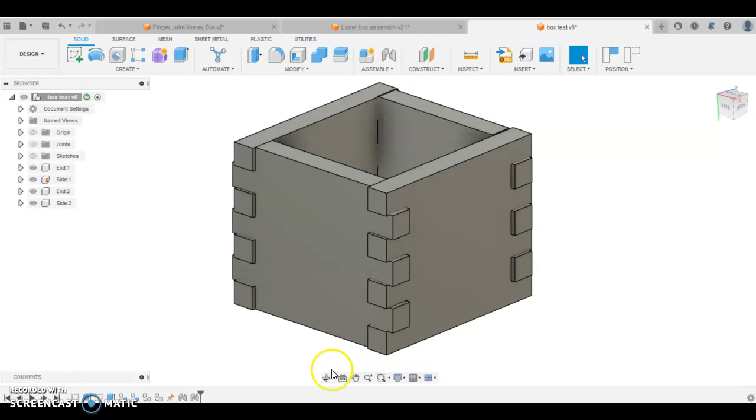I'm going to talk you through how to make a finger jointed box. We're going to use Fusion 360 for this, which is the very manual way. There are other ways—if you look online, there's one called MakerCase.

If we go into MakerCase, we can set all the parameters to create a finger jointed box, and export those plans. That would work really well if we were going straight to the laser cutter, but if you want to edit that further, there's a bit of a process of putting it into Fusion.

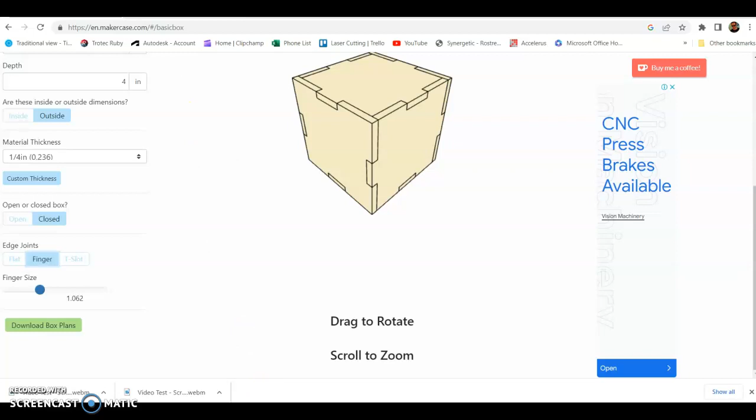So let's think about the basics. This is a little basic finger jointed box. You can see it doesn't look like it's going to fit together too well, but I'm going to explain why that looks like that in this video.

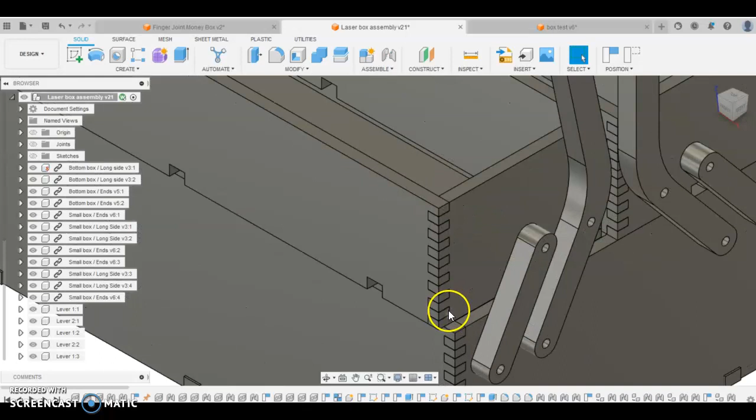There's also this project here which I've been working on—it's a cantilever toolbox. You might have seen this in the workshop at school. It's coming together quite nicely, so that's kind of where we could go.

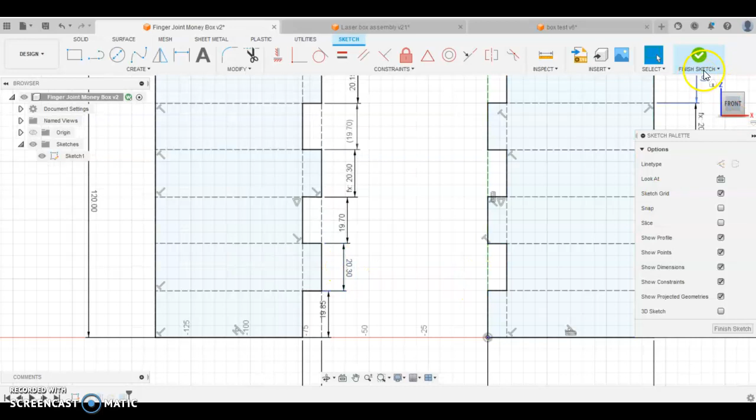I'm going to start by talking through this sketch here in Fusion. It looks really complex, but it's fairly simple to understand what's going on. You can see, before I finish the sketch, we've got two components here that will fit together.

One's going to be the side and one's going to be like the front and the back. We have to do a few more things to that yet, so let's get into showing you what we need to do.

First thing I do is always save the work, so I've called it test finger box. And now I'm going to create a new sketch.

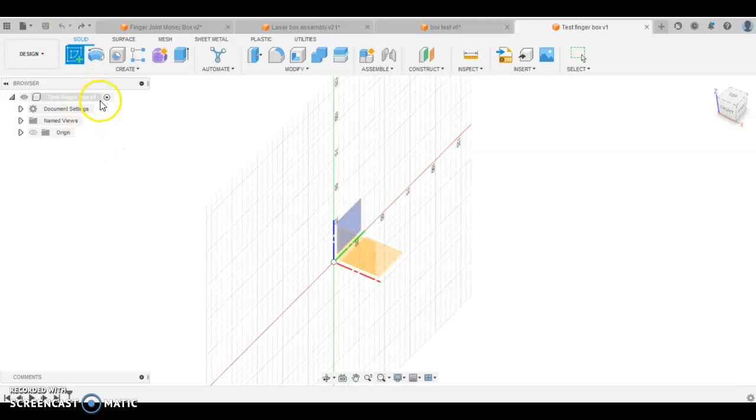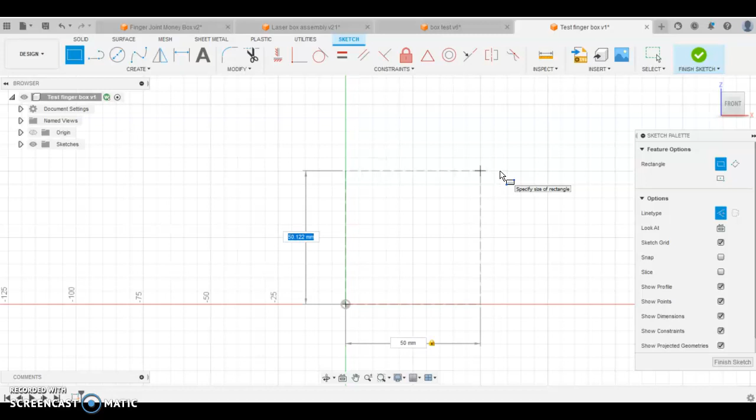I'm going to sketch on the front plane, and I'm going to build some construction lines to create a side and a front for my box. With the line type, I want to select construction, and I'm going to draw the overall size of my side—50 by 120. I'm going to make it like a tall kind of money box.

Now I'm going to block in the height of the fingers. I'm not going to put too many in this one—about 5 or 6. I might make them about 20 high.

As you're doing this, try to avoid this midpoint—you can see the triangle next to my cursor there. It can come up a little bit. We don't want any unnecessary constraints as I put this together.

Now I'm going to press D for dimension—you can see it over here, that's the dimension tool. I'm going to click the line, and between the two lines I want a dimension. I'm going to put 20mm steps or fingers in this box. So you can see I just typed in 20 and then the next 20.

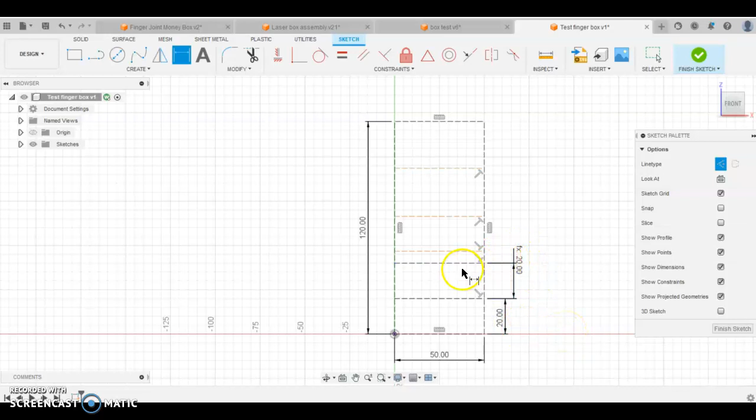Rather than doing that, if you get the dimension to this point where it's highlighted in blue and click the first 20, you get this FX, which is a driven dimension. I'll do it here as well—at that point I'll click this first 20, and then when you get to the end, you can clean up these dimensions just to make sure they're nicely stacked.

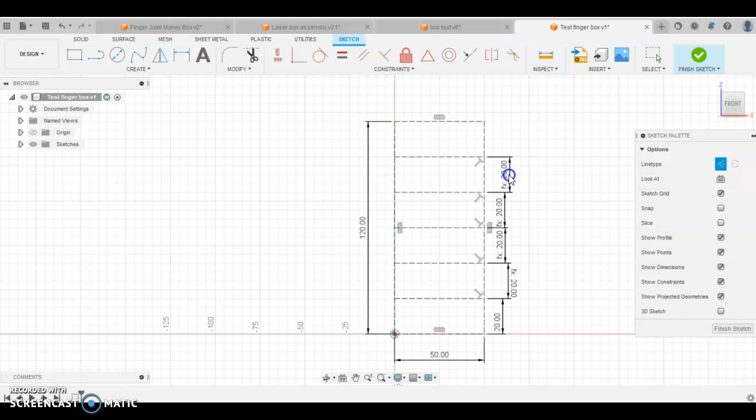If I change this one, say to 21, you can see they all change together. Go back to 20. If I try and dimension this last one, it's going to give me an error saying it's over constrained.

If I create a driven dimension, it puts it in brackets, and that way if I change my overall height, you can see it updates to that remainder measurement.

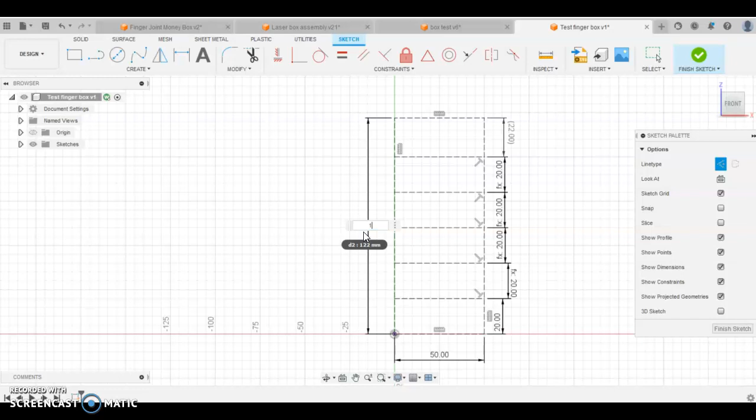Say if I didn't want this overall height in, I could delete that one first and delete this one. Dimension this to be the same, so 20. And then I could put my driven dimension on the overall—so you can see that adds up to 120.

Now if I change this to 21, it's updated the overall height to 126. Hopefully that makes a bit of sense. I'll change it back to 20, and we'll continue measuring this project up.

I'm going to go back to line and make sure construction line's still selected. I've just put a construction line down to show the depth of my fingers now—this will be my material thickness. I'm going to use an 8mm pine for this project, so I'll leave that at 8mm there.

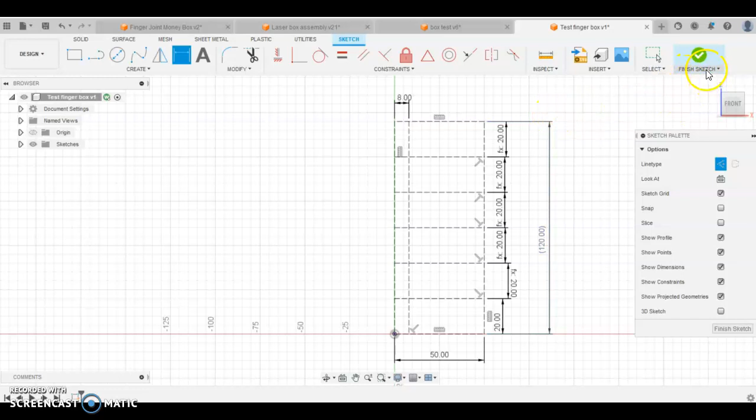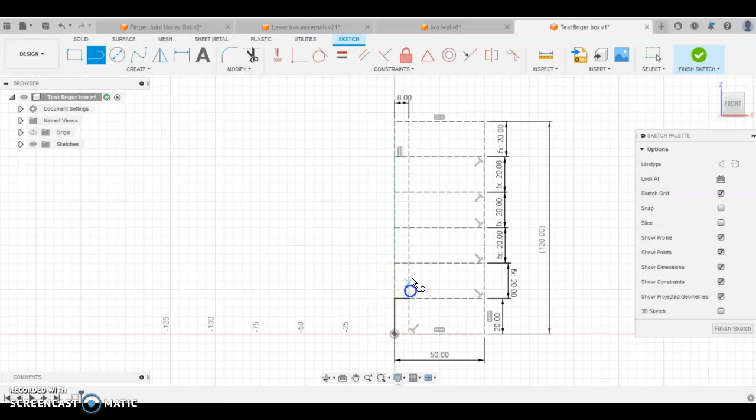Now we've got all the construction done on our sketch, we're going to click the line type and deselect construction, come up to line, and we can block this in now with bold lines. Let's start at this corner here, and we're going to go up the fingers and click each corner point. It's important to hit the corners as we do this.

Because if we update the measurements, we want these lines to go with our project. So it's one click on and one click off of each line. Do the whole thing—watch what happens when I finish this outline. It goes kind of a light blue on the inside, which means we're ready—we've finished that sketch.

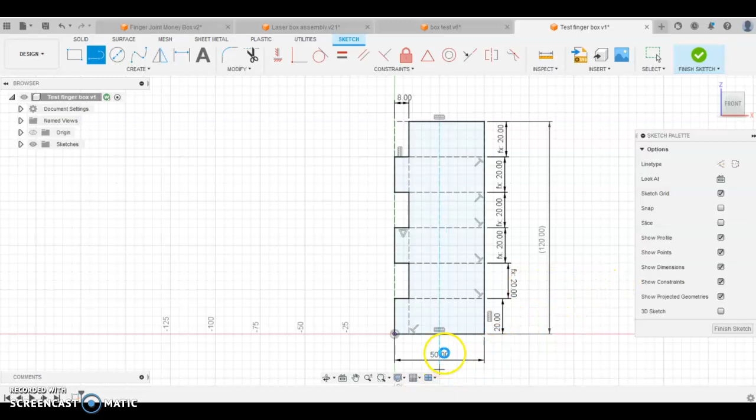That's the overall sketch. Now I'm going to mirror this eventually, so it's going to come out here and the fingers will transfer onto the other side. That really means this one here needs to be half the size of our overall box, so I'm going to reduce that to 25 now. That looks pretty small to me, so let's try 35.

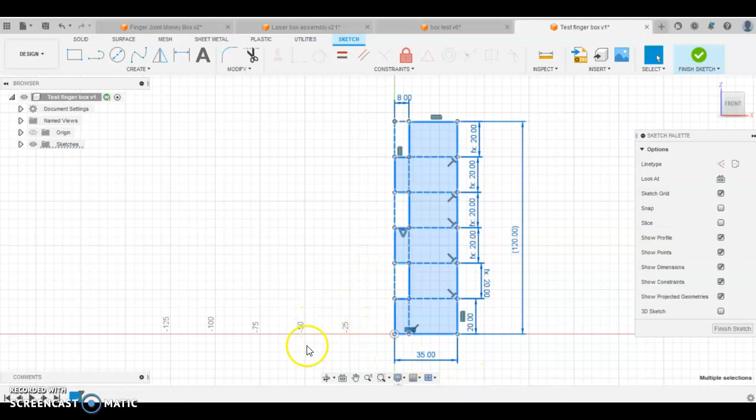At this point we can copy the overall sketch and draw the other end or the other side. So I'm going to Control C to copy and Control V to paste. You've got some handles here to bring out, and we can also rotate this view 180 and just bring it roughly up into the position we want. Click OK, and we've got a complete mirror of what we've just done.

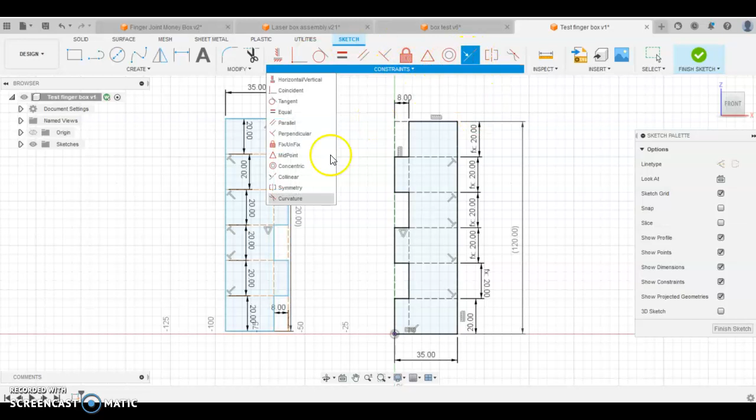To align this, under constraints I'm going to use collinear, going collinear from the bottom line to the bottom line. That just snaps it into position there. If I press escape and move this now, it still moves along that plane, so to lock that into position we're going to dimension it out from the origin point.

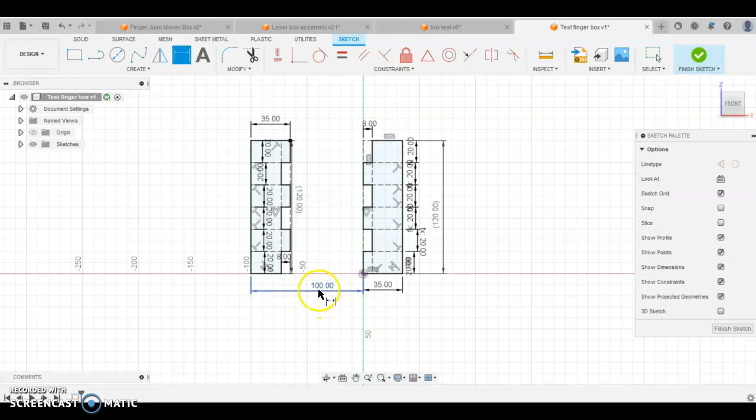So I've cleaned up the measurements a little bit here. You can delete the pins, keep the 8mm for the depth, material depth. Make sure you've got the 120 dimensioned on the side here.

First thing I'm going to do now is allow for that kerf with these two pins. These are the easiest ones to calculate. Between the two lines here, we want the 20, and we want to add 0.4, so that allows for a 0.2mm kerf on each side. We're going to do the same for this one because it's a full pin going into the full kind of slot.

Now at this point, let's have a think about this one. We want it to be level at the top of the 120, but you've only got it going into one side with the cutting kerf. So this one's going to be 20 plus 0.2.

Now the remainder, let's think about this one here. So this component here should be the 20 minus 0.2. So 20 minus 0.2.

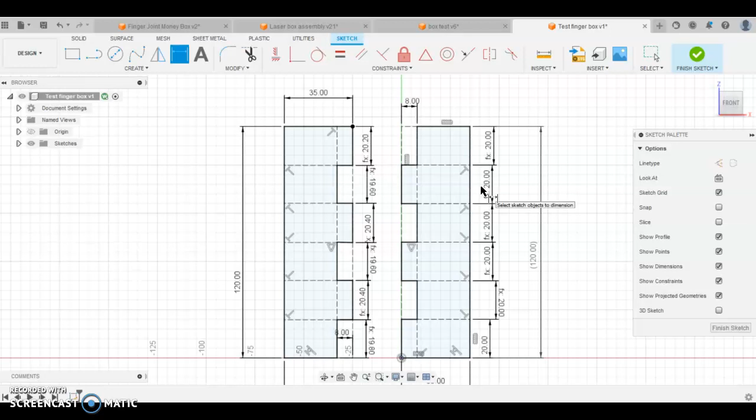So that should make our project fit together really nicely. That's the finish of the sketching, so we can go finish sketch, and now we're going to extrude both those components. This is where the project starts to make a bit more sense.

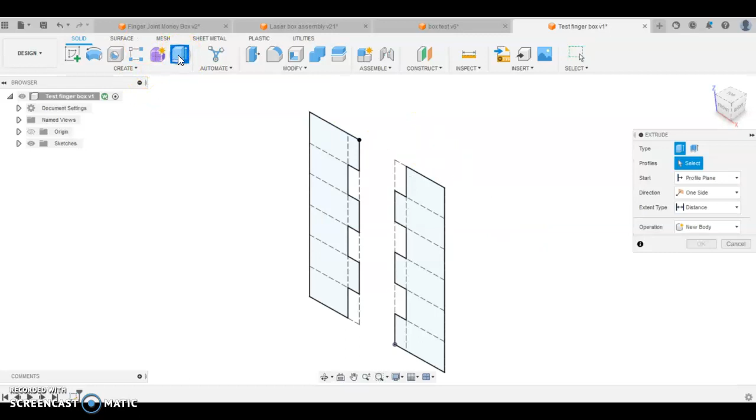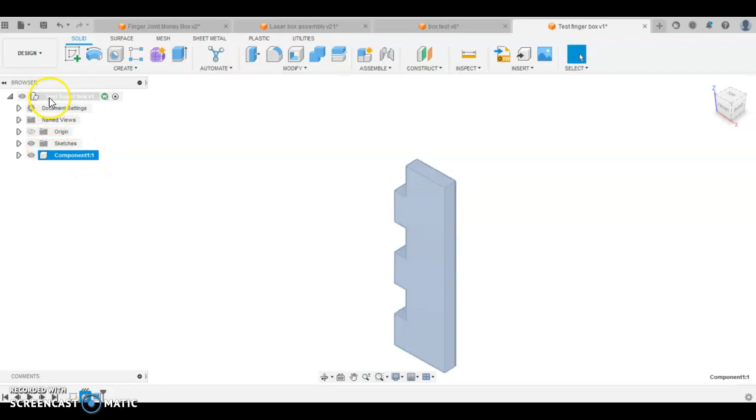So we're going to go to extrude, select a profile, and choose 8mm, which is the material thickness. This is really important in this section - where it says operation here, we want to go down to new component and click OK. You can see the component has arrived here as a separate component from our assembly, and we're going to turn the sketch on that we drew earlier.

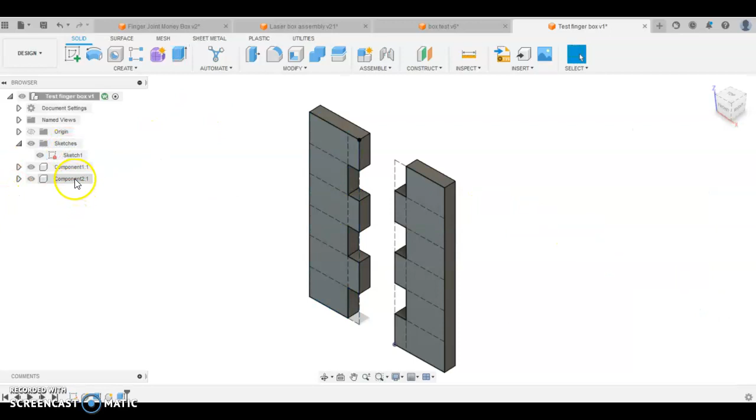So we're going to go extrude again, click this extrusion, and put in our measurement, say 8. Same deal, come down to new component, watch over on the side here - there's component 2, and then we can hide our sketch.

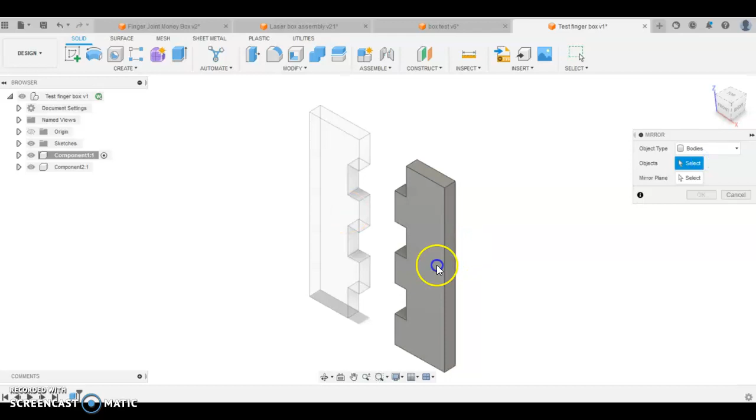So we've got these two components that will fit together. I'm going to do a mirror to kind of extend, so I'm going to go create. Before we do that, let's highlight the component that we're working with. So activation, we're going to go to create, mirror, the body - that's our body, and this is our mirror plane. Click OK, and we've got one side.

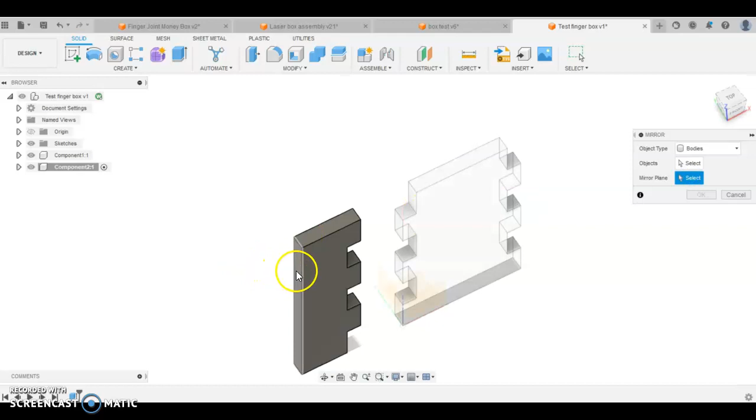Now we're going to activate the second side, and go create mirror, choose body, and then mirror plane, and we have got our two components.

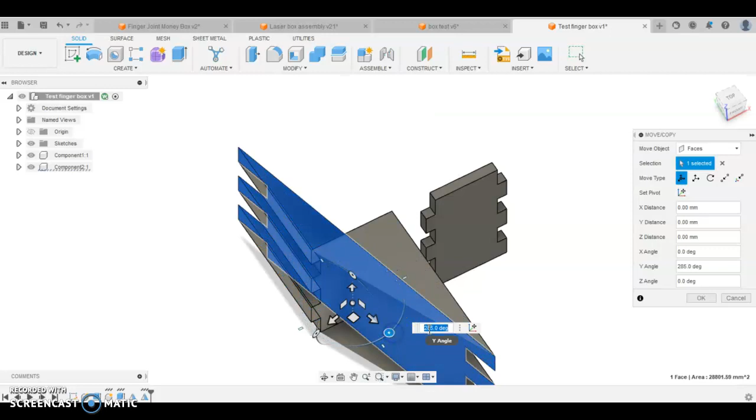If I activate the main assembly now, I can use the move tool to rotate this component. It's not what I was expecting to happen - because I'm on face here, I want component. That looks better.

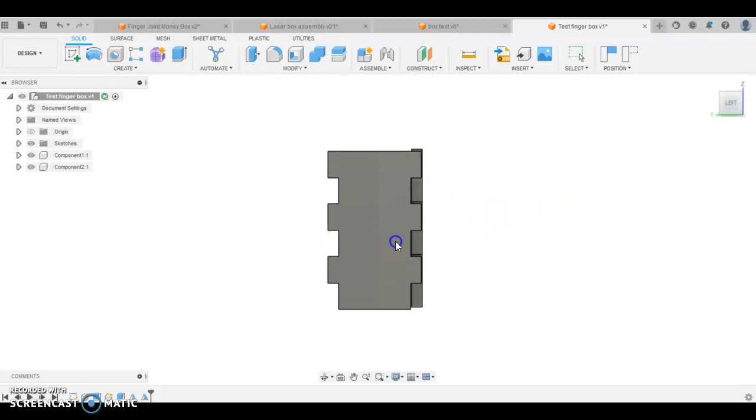Now don't put too much effort into getting this looking perfect, because we'd use the joining technique to do that, but we're just going to get it roughly in position. If you do it from two views, you can get it somewhere near the mark. So that's close enough for what I'm going to show you.

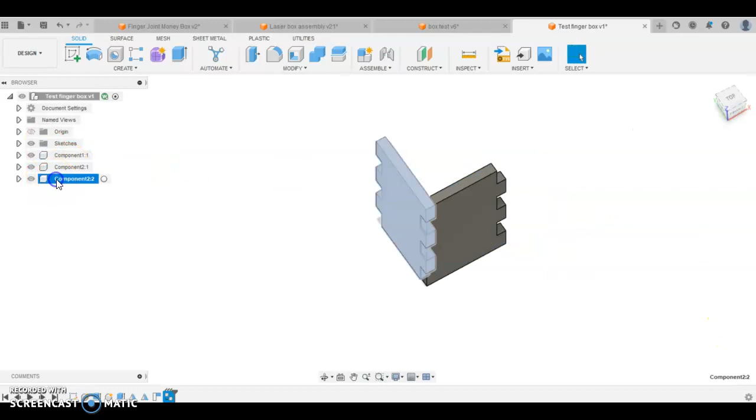I'm going to select this component here and go copy, and then up to the top one and paste. Capture position, and then we've got two components now. Sorry, I have to do this manually because I selected the wrong thing. We've got two components for the side.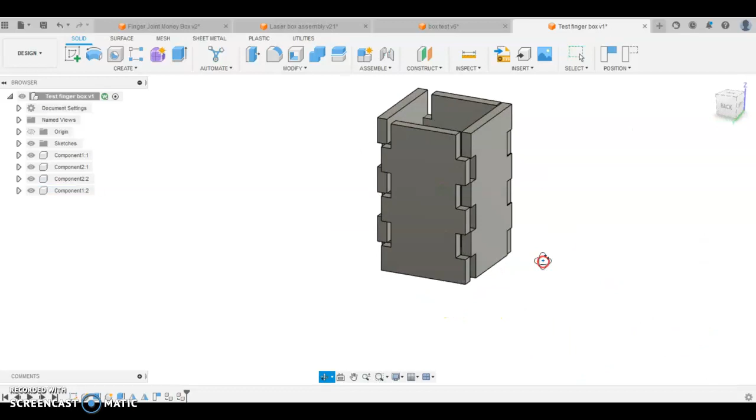We'll do the same for this one, so copy the component, come up to the top and paste the component, and bring that aside. So now you've got all the components for the outside of the box. We'll make a lid and a base separately. So that's the starting point of creating a finger jointed box manually using Fusion 360.